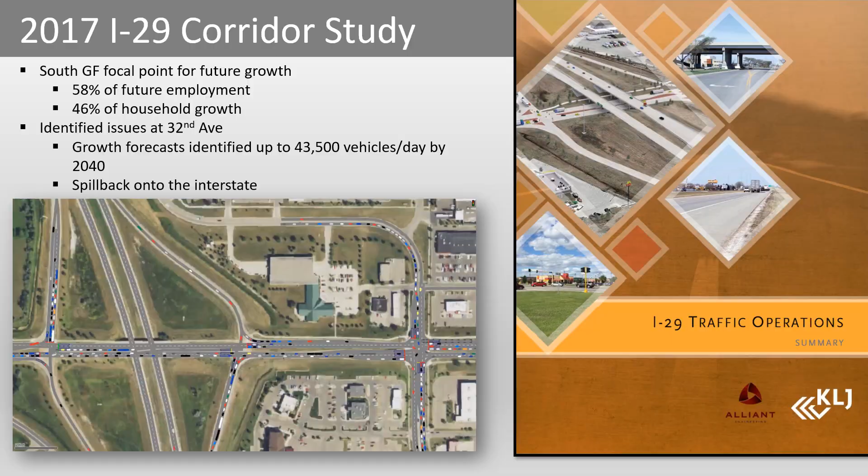The two major components that will need to be wrapped up in this preliminary phase will be completion of the interchange justification request as well as the environmental document approval. I'm now going to pass it over to Mike Bittner to provide a brief overview of the existing and future conditions assessment.

Our story begins at 32nd Avenue, which is also US Business 81. This corridor carries upwards of 30,000 vehicles per day with direct access to some of the region's largest traffic generators, ranging from the Alerus Center to the north to several big box retailers in the mall. The corridor generally operates acceptably today with a bit of congestion during the peak hours.

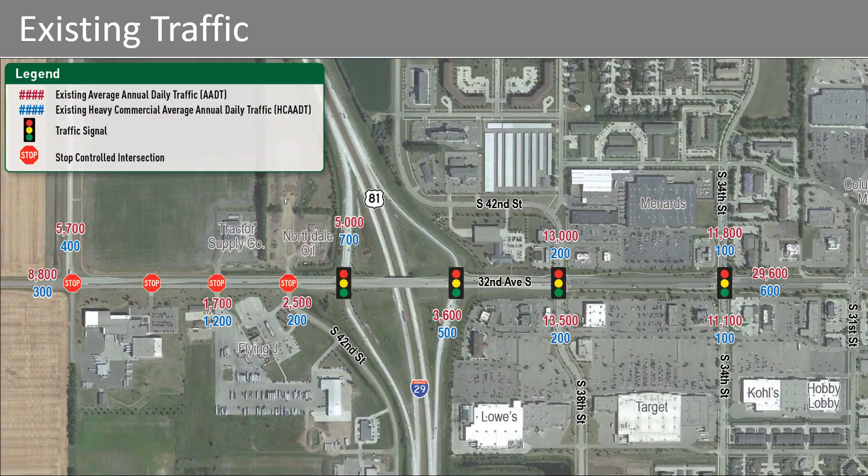This area, however, becomes the epicenter of growth in the future. More than 50% of our population and employment growth for the region occurs within 1 mile of either 32nd Avenue or 42nd Avenue South. A large portion of this land is already being planned by developers and property owners. This produces significant traffic growth without new connections to relieve pressure. We see traffic grow around the 32nd Avenue and I-29 interchange from around 25,000 vehicles per day all the way up to 47,000 vehicles per day.

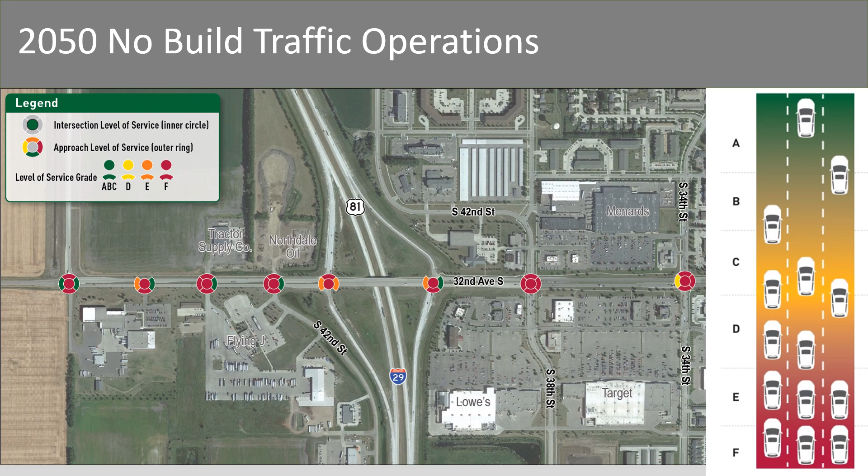This amount of traffic growth significantly strains the transportation system. We gauge transportation infrastructure effectiveness using level of service, which you can see on the right side of the screen. Level of service ranges from A to F, A being free flow traffic movement and F being deficient. NDDOT requires that we are at a level of service D or better. This corridor operates entirely at level of service F in the future with planned growth.

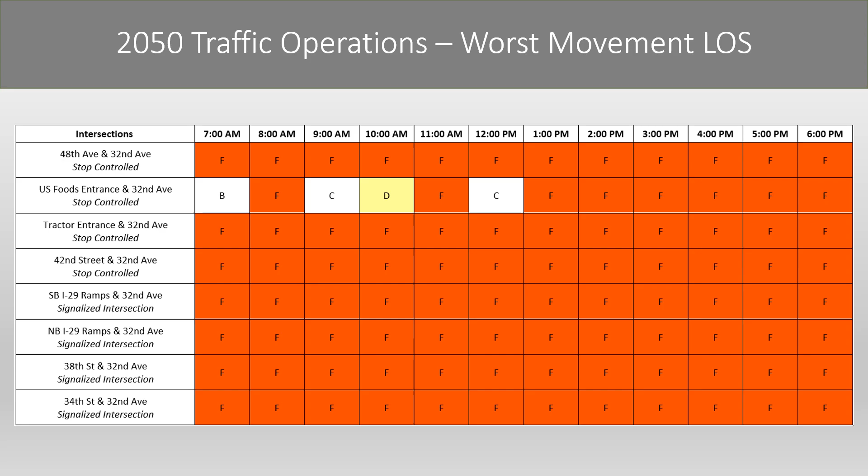Congestion occurs not only during peak periods but throughout the day. This table illustrates an hour-over-hour analysis of congestion, with nearly every intersection having deficiencies by that future 2050 scenario. This last graphic illustrates the potential for traffic queuing under this growth scenario in 2050.

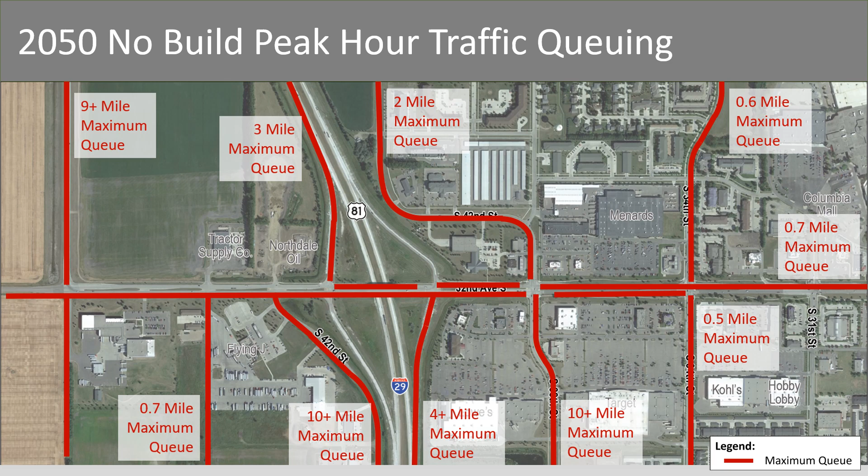It's important to recognize that it's far more likely that development would stagnate before traffic conditions of this magnitude would occur. Our preliminary estimates show that only about 1/3 of the growth planned for this area could occur before traffic operations become deficient. This provides a major strain to the economic development potential of the community.

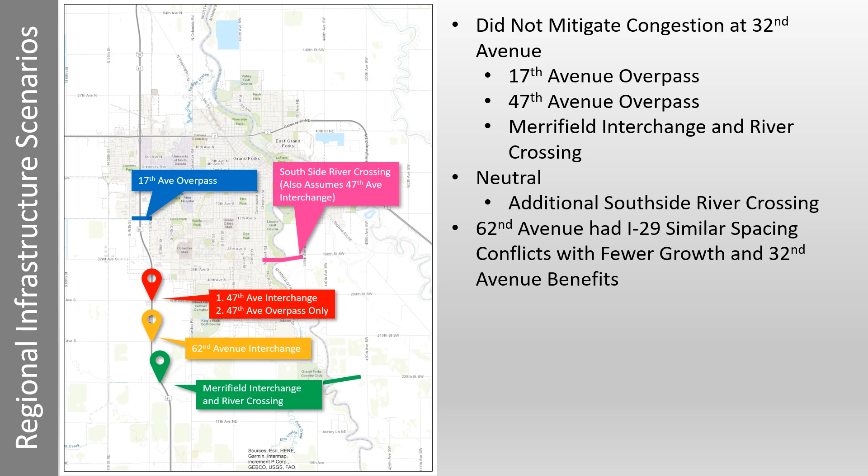Next, we'll discuss what types of improvements can resolve our future capacity deficiencies. As part of our process, we looked at a wide variety of different regional infrastructure improvements, ranging from overpasses over I-29 to interchanges, river crossings, and a combination of multiple improvements together. What we found is that the only solution capable of reducing congestion at 32nd Avenue and I-29 interchange, while also providing a positive benefit to cost ratio, was a new interchange at 47th Avenue or just south.

As we start to think about when an interchange is needed, we evaluated that 32nd Avenue corridor under 2050 growth scenarios without an interchange. What we found is that as soon as 2027, we can start to expect some pretty significant deficiencies at our major bottleneck location of 38th Street. But as we start to average the entire study area, we see that by 2029, we can expect this entire area to have deficient traffic operations.

This is based on the assumption that the earliest we could start to see some new traffic generated is around 2025, once we have adjacent and improved roadway connections to this growth area in and around 47th Avenue.

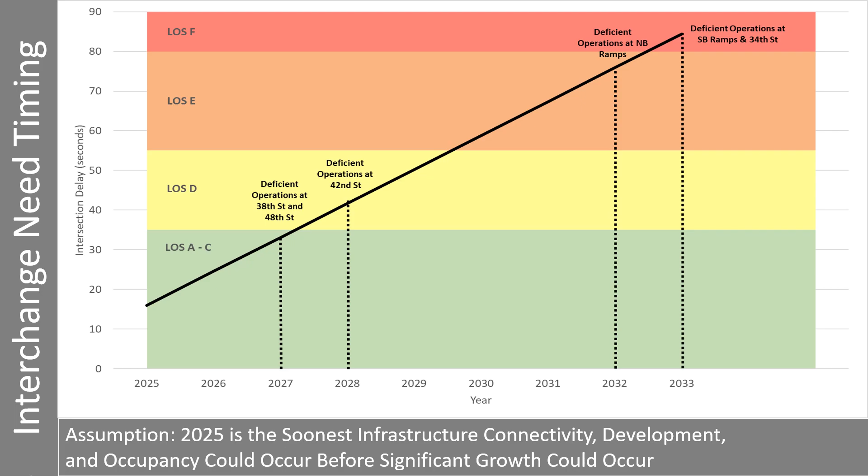Previous forecasts estimated that this corridor could carry around 26,000 vehicles per day by the year 2035. However, we eclipsed that number very quickly by the year 2015, and traffic is currently upwards of about 32,000 vehicles per day.

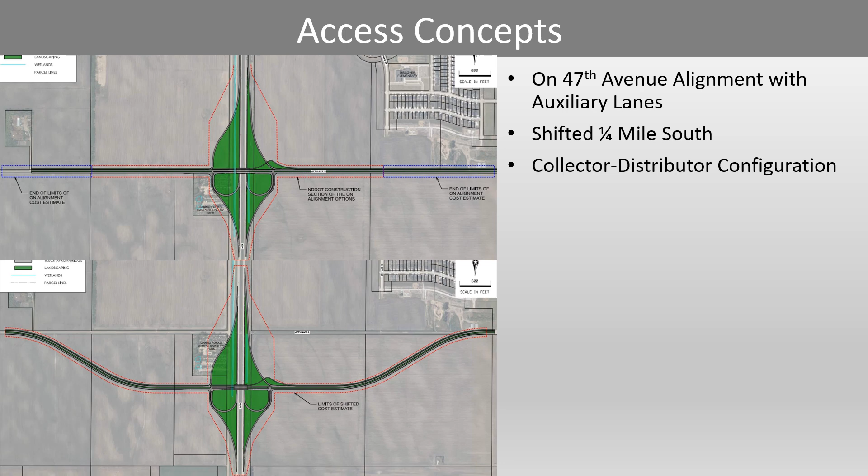Next, we'll discuss the I-29 access configurations and the overall alignment of 47th Avenue. We evaluated 3 potential access concepts at I-29. The first is the direct alignment of keeping 47th Avenue on its current alignment and connecting to I-29 at that location. The second is to shift this a quarter mile south to provide us some additional space between 32nd Avenue and 47th Avenue as it relates to merging and diverging on the interstate system. And then the last concept is a collector distributor configuration, which I'll show here in a few slides.

This first access configuration is directly at 47th Avenue. One of the features of this concept is we would include an auxiliary lane, which would connect the ramp at 47th Avenue up to 32nd Avenue, which is about a quarter mile access spacing. What this allows us to do is to improve the operations of that small stretch of I-29 and allow it to maintain a level of service B or very acceptable traffic operations, even with some increased traffic volumes from the new interchange.

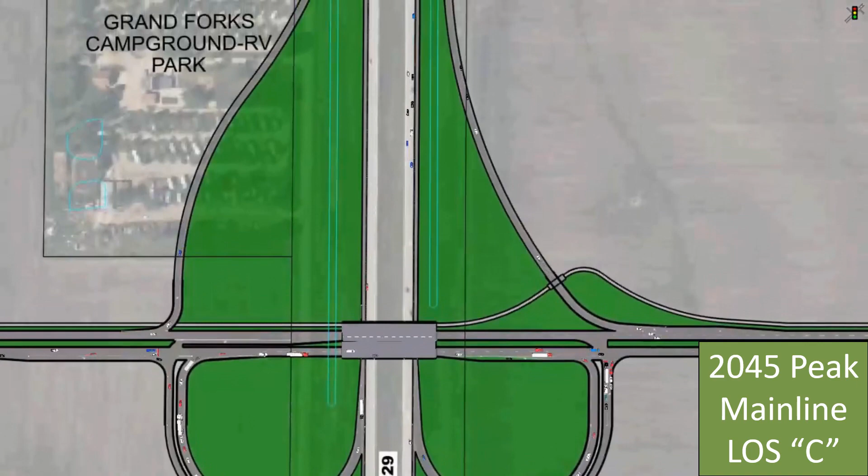The second concept would be to shift the alignment a quarter mile south to provide some additional space on I-29. Because this is a little bit further away, this concept does not include an auxiliary lane that connects the two interchange ramps. However, that additional space does provide some relief. Overall, this operates just slightly worse on I-29, but still with a very acceptable traffic efficiency rating of level of service C.

This last concept is called a collector distributor configuration. What this does is it creates a separate roadway system adjacent to the interstate to facilitate movements between the interchanges. And so the way this would work is that if you wanted to exit at 32nd Avenue, you would exit prior to 47th Avenue. Do note that our graphic is turned on its side with north being to the right in this particular slide. You can see the cross section at the bottom.

The benefits this provides is by adding this additional and separated capacity, you are able to achieve a level of service A and the most efficient and safe operations on mainline, with the downside being that it does come with an increased cost.

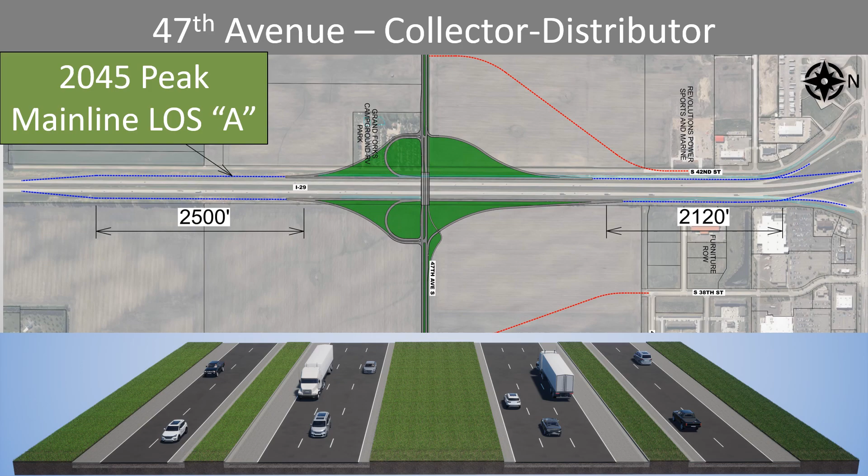So as we laid out alternatives, generally speaking, the project corridor does not have a lot of existing constraints and it's largely composed of undeveloped farmland. However, the Grand Forks Campground and RV Park is located right along 47th Avenue on the west side of the interstate and would be impacted by all of the proposed alternatives.

We did preliminarily look at shifting the interchange further to the south to avoid impacting the campground. However, other than 47th Avenue, there are no other east-west collector roadways due to the presence of the King's Walk Golf Course. And shifting the interchange further to the south while still tying back into 47th Avenue did create some undesirable roadway geometries.

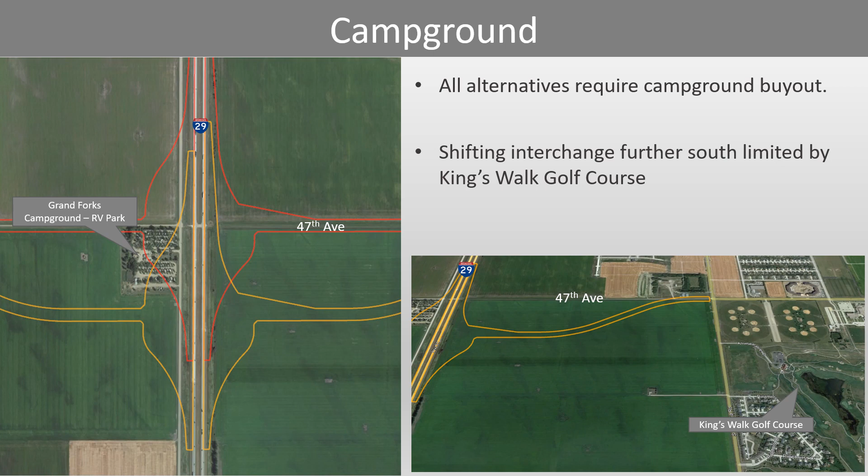We also looked at shifting the interchange all the way down to 62nd Avenue, but when running that alternative through the traffic model, it did not provide the same operational benefits needed to address the traffic at 32nd Avenue. So, unfortunately, relocation or complete acquisition of this business would likely be required for the project.

The other existing constraint within the study area is the presence of an overhead high voltage transmission line that is owned and operated by Minn-Kota Power. As you can see in the figure, this transmission line crosses I-29 at a skew right near 47th Avenue. The tower locations for this line are shown as the circles with an X through them.

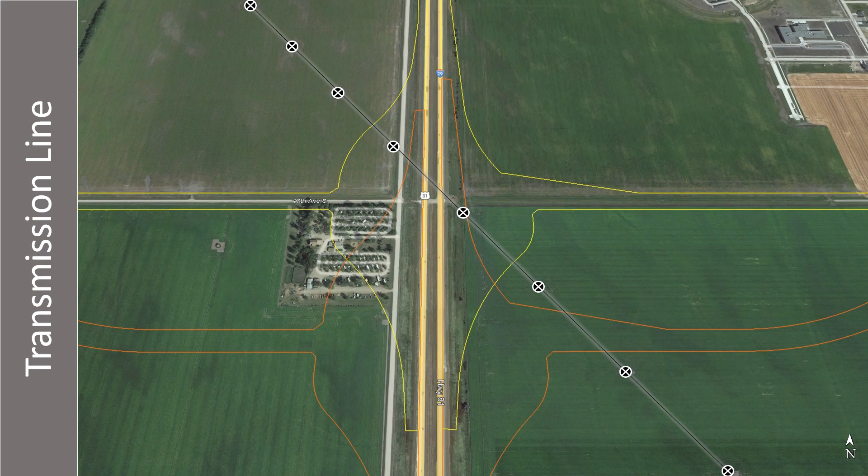And as you can see, when laid out relative to the footprints of the on alignment and shifted alignment concepts, the shifted concept would result in relatively minor impacts to this line, likely having to move one tower location, while the on alignment concept would directly impact two pole locations, requiring the line to be rerouted either to the north or south of the interchange.

The project team has had some preliminary discussions with Minn-Kota. Based on those conversations, as well as looking at our alternative footprints, the scope of work that would likely be required for relocating this line would include removal of 4 existing tower locations, installation of 3 new dead-end structures, as well as the installation of 3 new tangent structures.

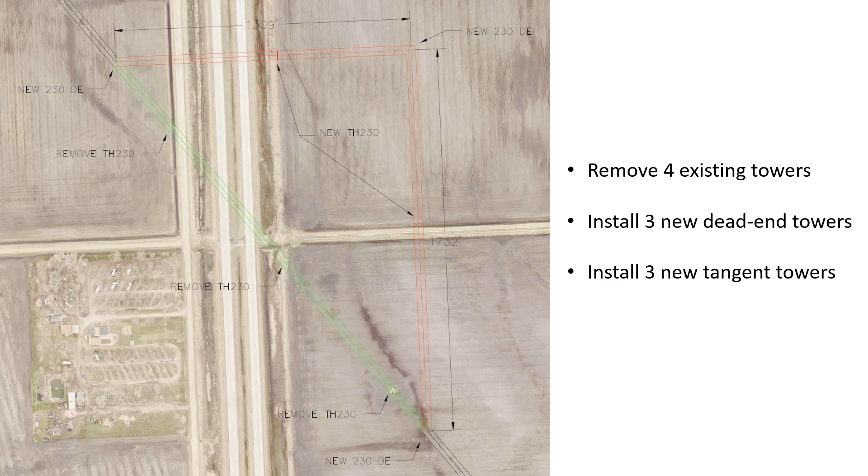So as we look at a comparison of the on alignment concept, shifted concept, and collector distributor concept, we see that in terms of crash potential and I-29 traffic operations, the collector distributor concept performs the best, primarily due to the elimination of those merging movements. The on alignment with auxiliary lane also performs well, primarily again because of that auxiliary lane and ability to eliminate some of those traffic merging movements.

In terms of construction cost, the collector distributor is a fair bit more expensive than the on alignment and shifted alignment concepts, with the on alignment having the lowest overall cost. Utility impacts we just touched on, and then with regards to right-of-way, the on alignment concept has the lowest overall right-of-way needs, while the shifted alignment concept has the greatest overall right-of-way needs, primarily due to the additional right-of-way needed to tie back into 47th Avenue.

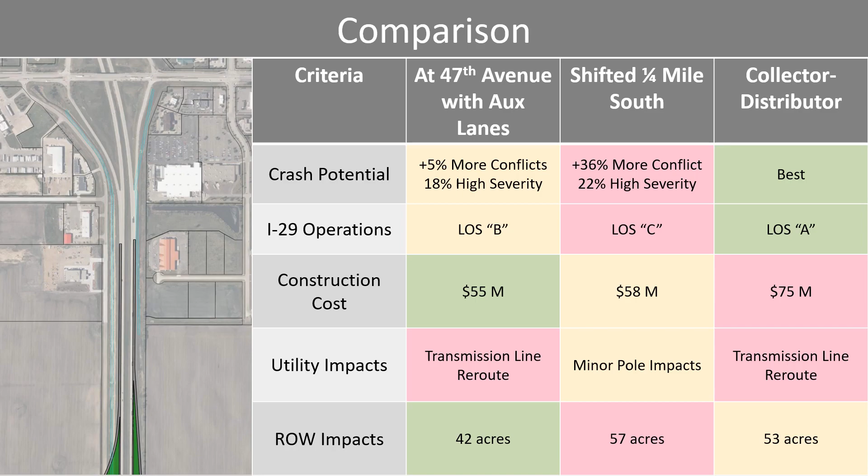So with that, I'm going to turn it back over to Mike to present the interchange configuration concepts.

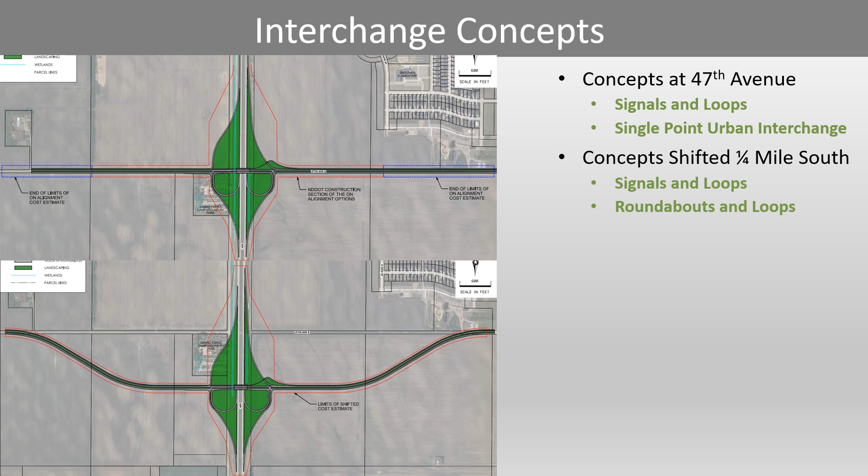We evaluated a wide array of different interchange configuration concepts. And when we talk about interchange configuration concepts, we're talking about how traffic operates at those major ramp intersections. Are they traffic signals? Are they roundabouts? How many intersections? What's the spacing? You name it. What we found is that there were 4 different variations that would operate quite effectively and that will be considered through the environmental document process.

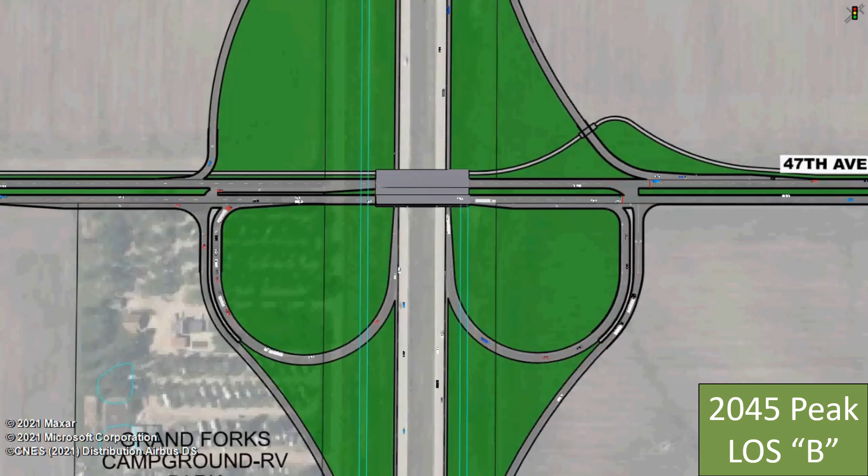The first configuration is a very traditional design. There's a very similar design at I-29 and 32nd Avenue in Fargo. This combines loops that are folded on the south to create separation from the interchanges to the north, in addition to traffic signals. However, in the short term, traffic signals will not be warranted, so this would likely be a stop control on the side street approaches. Overall, with 2045 growth and projections and this configuration with traffic signals, we expect this interchange to operate at a very good level of service B.

This second concept is a modified single point urban interchange. And the primary difference between this concept and the previous concept is that the 2 intersections are merged into one centralized location. This provides the benefit of providing additional space between this primary interchange access and adjacent intersections, which can often be a challenge at most interchanges across the state. This does come at the extra cost of having a much larger bridge to accommodate all of these movements in one centralized location.

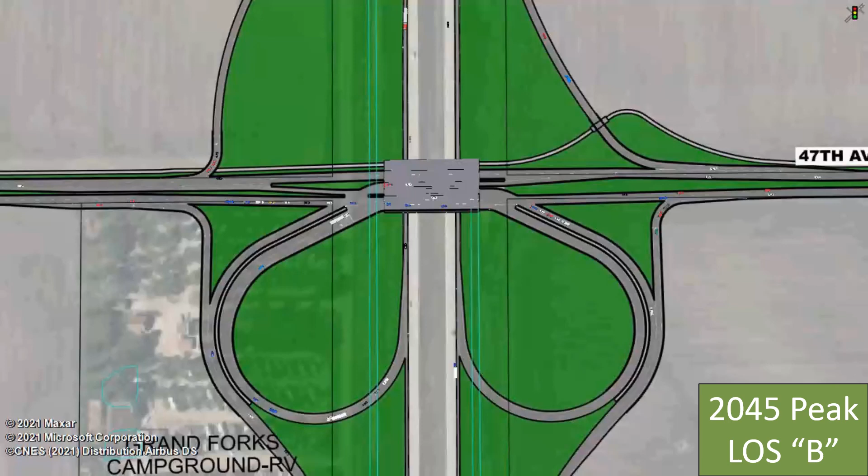This last concept is a single lane roundabout configuration. This design operates acceptably at a level of service B, similar to the previous 2 concepts. The primary difference is the location of those loop ramps, as well as the intersection operations with the roundabouts. One of the primary benefits of roundabouts is the elimination of angle crashes, meaning you would expect to see reduced potential for serious crashes relative to a standard intersection configuration.

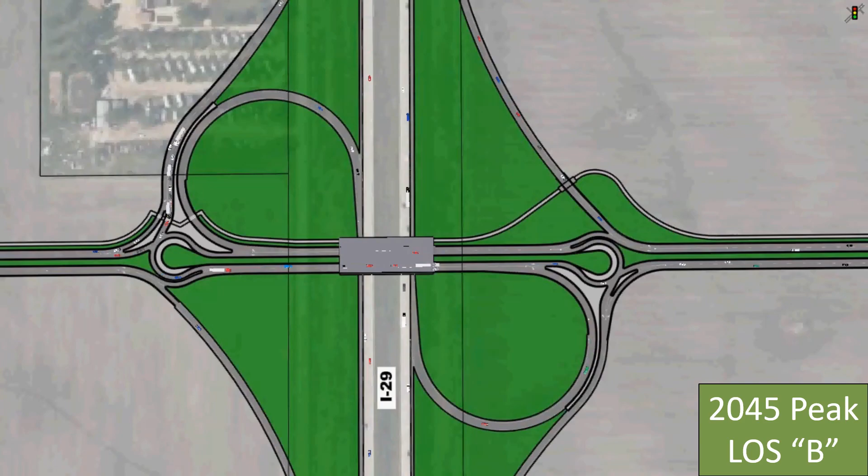As we compare these alternatives, the on-alignment signals and loops, as well as the on-alignment SPUI, do have the least amount of right-of-way needs, whereas the shifted alignment alternatives have the greatest overall right-of-way needs.

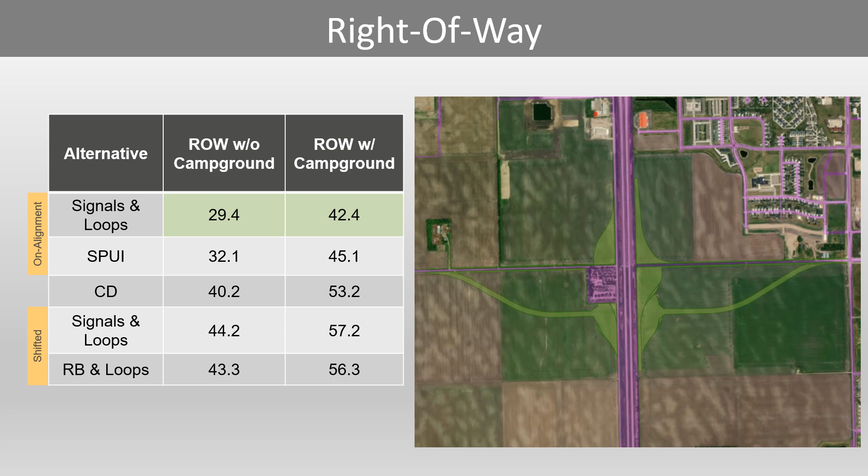There are no identified floodplains that would be impacted by any of the alternatives, and similarly, no impacts to cultural or historic resources are anticipated for any of the alternatives. Right-of-way needs we already touched on, and then prime farmland impacts would be similar to right-of-way, with the on-alignment alternatives having the least amount of impacts and the shifted alignment alternatives having the greatest amount of impacts. I am now going to turn it back over to Mike to talk about proposed alternatives for tying into the local roadway network.

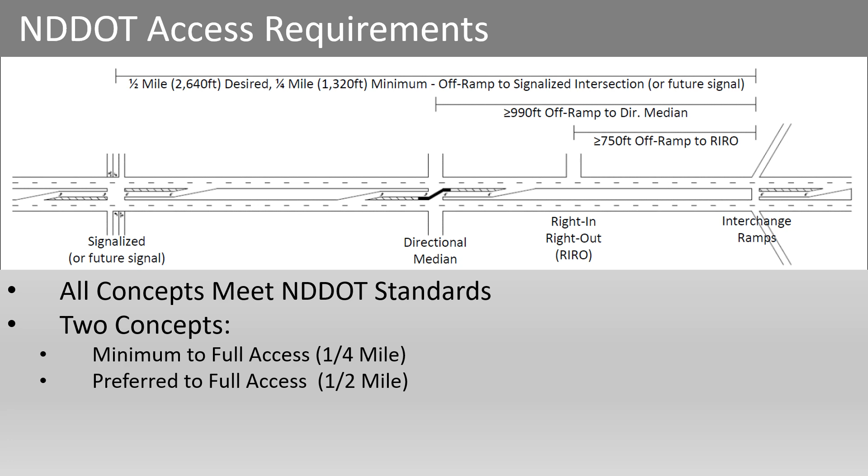The North Dakota Department of Transportation has very specific access spacing requirements to that first access point, either east or west of the interchange. This is really important because the vast majority of interchange deficiencies across the state occur at that first intersection location. So we're going to look at two concepts. The first looks at the minimum requirement for that first access point, which is about 1/4 mile away from that ramp intersection. And the second is the preferred, which is 1/2 mile.

So this first concept is the preferred access spacing. So you can see we're about 1/2 mile to that first access point, which puts us generally in line with 34th Street to the south. We would have some limited access points at 38th Street, which would be a 3/4 access, which means that we could not have traffic on that side street go straight or make a left turn off of it.

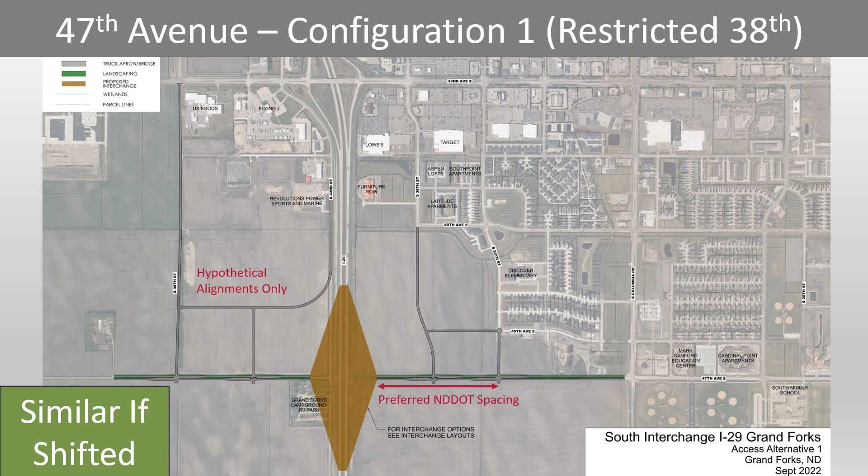The second concept is the minimum DOT spacing requirement, so 1/4 mile to that first full access point, which now aligns with a more shifted 38th Street alignment. We also still maintain that 34th Street, similar access to the west as well.

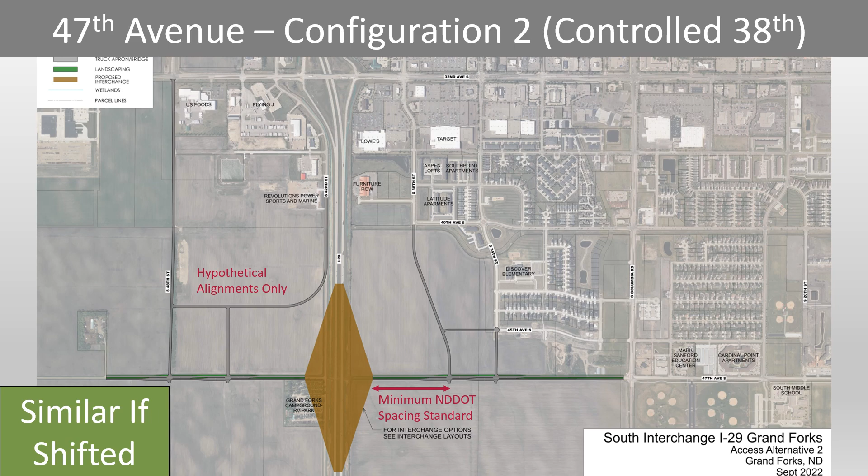So as we look to compare the access considerations, specifically looking at restricted access at 38th versus controlled access at 38th, the controlled access for the most part comes out on top, with exception to meeting NDDOT preferred spacing requirements. From a traffic operations standpoint, controlled access at 38th performs quite a bit better with no failing movements and an overall level of service of C. It has a better potential for redistributing traffic to I-29. From a safety standpoint, it has fewer total conflicts.

Also, in terms of ped bike, having restricted access at 38th would likely push more traffic to 34th Street, which goes through neighborhoods and past Discovery Elementary, which ultimately could negatively affect ped bike movements in the area. And then finally, from a cost standpoint, both alternatives are relatively comparable.

So now that we have looked at alternatives, we want to touch on next steps. As we touched on in the beginning of this presentation, we are currently here in January conducting the second public input meeting for the project. This public input meeting will be followed by a 15-day comment period running from January 12th through January 27th. Following the close of that comment period, the project team will be looking to finalize the environmental document, which is anticipated to include identification of a selected alternative, and then also completing the interchange justification request.